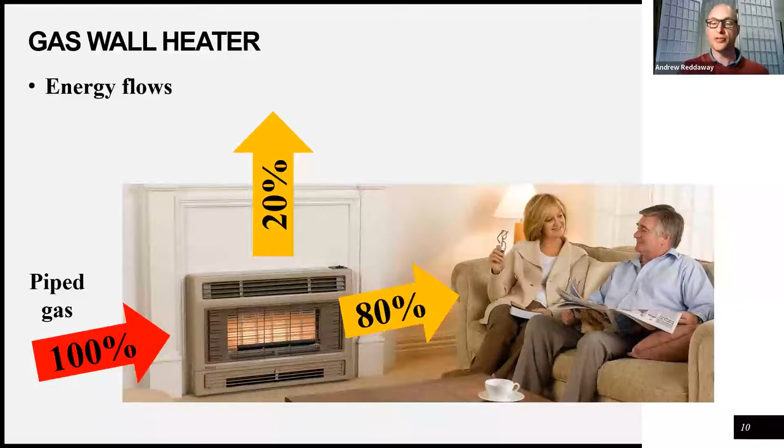There are some gas heaters that are unflued - they haven't got that chimney taking the gas outside, and in that case the combustion product, the gases released by burning, stay inside the home. They're really discouraged nowadays - I think it's really only older appliances or older installations where you might find those. But if you do have an unflued gas heater, you have to be a little bit careful. For example, if you seal up your house really tightly, which is normally a good idea for energy efficiency, with an unflued gas heater some people have run into problems when those combustion gases from burning the fossil gas build up in their home and cause health issues. So that's something to be aware of.

Ducted gas heating - this is quite popular in larger homes, especially in Victoria and also Canberra, not so much in the rest of the country.

There's a few reasons for that. One is the ducts have got a bit of insulation in the walls, but it's not super insulated. So the heater's sending hot air at the start of the duct, but by the time it comes up to the vents in the rooms, it's not as hot as it was. It's losing a bit of heat out, trying to warm up the air under your floor or in your roof cavity.

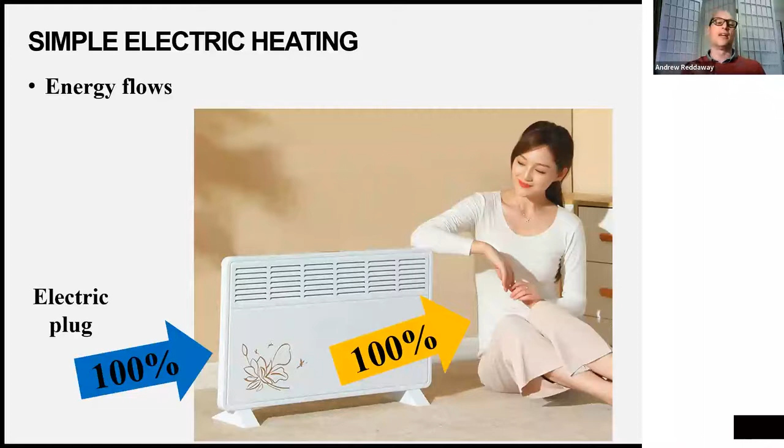So it's extracting heat and moving that heat through the pipe, which comes out of the indoor unit. That's why you can get a 500% efficient appliance. You're not limited to one-to-one anymore, because it's not just converting electricity straight into heat. The electricity is only needed to turn the machinery, and the machinery is moving the heat from outside to inside.

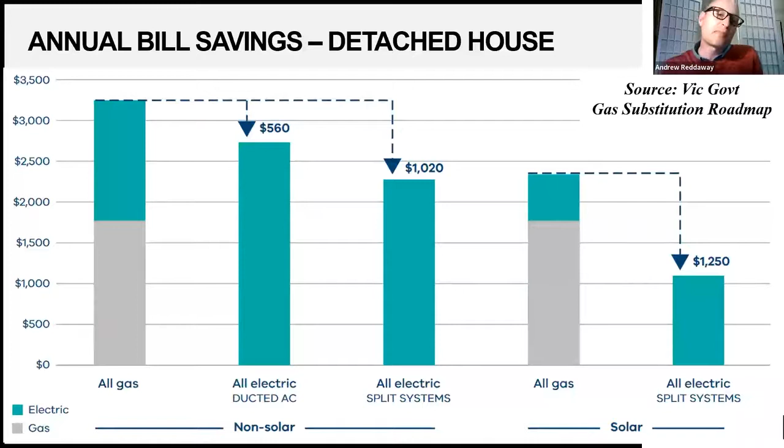All right, let's look at some examples of bill savings. This comes from the Victorian government's gas substitution roadmap, a great document they put out about a month ago. It lays out some of the issues with gas and starts aiming for reducing the amount of gas used in Victoria, substituting it with efficient electric appliances or potentially other options.

So for a detached house, about 4 bedrooms - a typical case - if they've got all appliances like heating, hot water and cooking on gas, your total energy bill is around $1,750 on gas, plus the electric bill on top, bringing you up to about $3,200 per year. Now, if you replace the gas ducted heating with ducted air conditioning instead, your annual bill saving would be about $560. If you replace the old gas ducted heating with split system air conditioners, you're looking at a bill saving of around $1,000 - showing the improved efficiency of split systems over ducted ones.

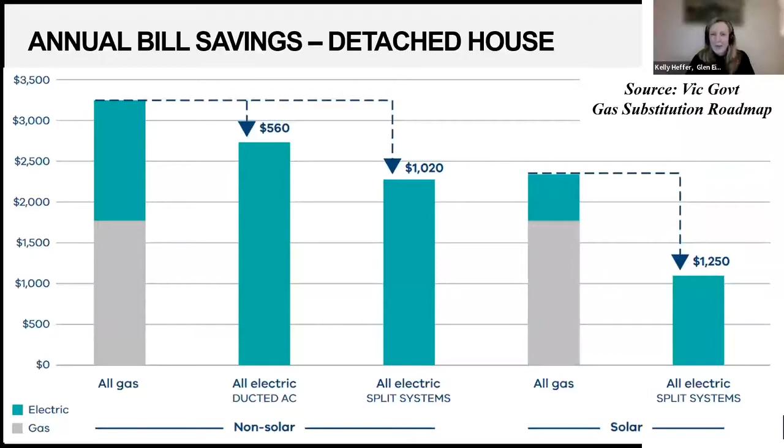Thanks. And Amelia has a question sort of back to the gas ducted heating and split system. So she's got gas ducted heating and also a split aircon in one room. She finds the gas ducted heating heats all rooms, but the split system doesn't. So it's around the question of whether you need a split system in every room like before. She's sharing her view that the split system aircon just isn't as effective, and it's only a couple of years old.

I'm not sure from that description if it's not effective at even heating the room that it's in, or it's just not spreading out to other rooms beyond the room that it's in. It only heats one room, so I guess it's about choosing something powerful enough, or multiple systems if you need it.

Yeah, that's right. A split system aircon is unlikely to be effective at sending air down the corridor and around the corner through another door. It's probably only really going to work effectively in the room it's located in, or the open plan living area it's located in. So if you're looking at multiple rooms or areas, you're looking at either multiple split systems or other alternatives like we discussed.

Oh, but by the way, there are multi-splits. That's where you have one outdoor unit that connects to multiple indoor units. So that's often a good option if you've got several rooms that you're looking to heat and cool.

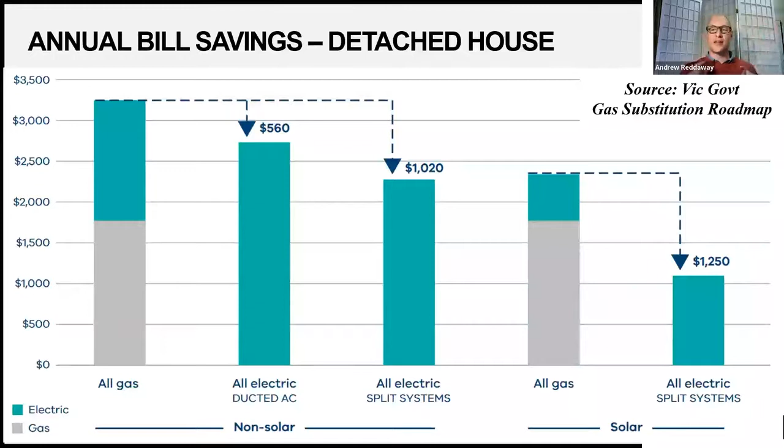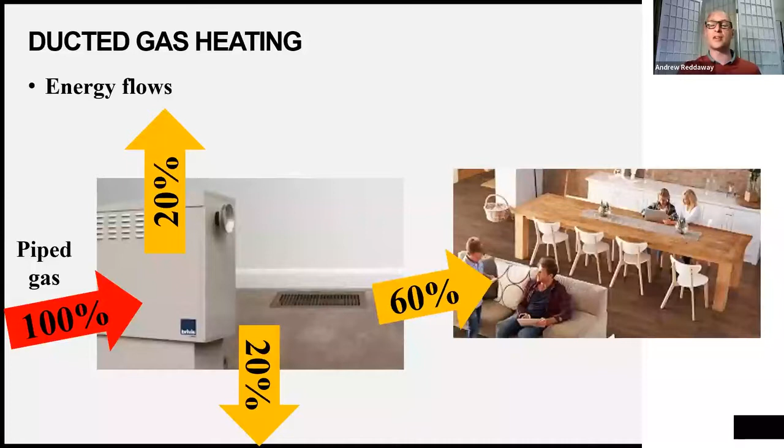Ducted is like what this is talking about here, ducted air conditioner. That's where you have a central air conditioner unit blowing air out through multiple ducts, sending hot air into multiple rooms to come out of a vent like in the ceiling or the floor. Those ducted air cons are very normal - new homes that are being built often have ducted air cons, so that's not hard to achieve at all.

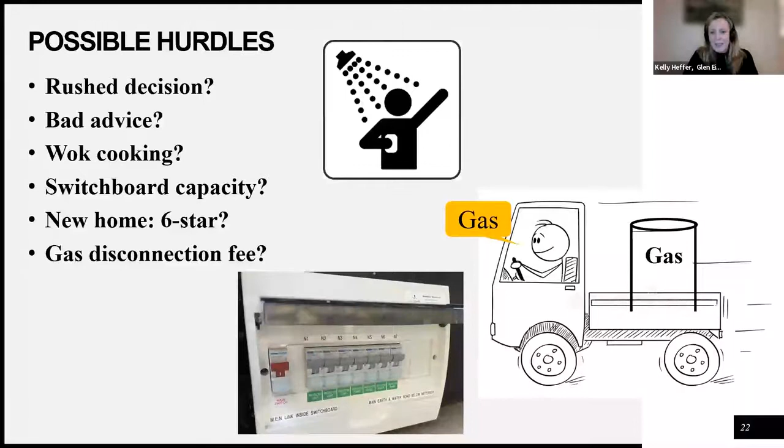Bruce has very helpfully commented on the heat pump hydronic heating question. Radiators are heated up to about 70 or 80 degrees, which requires a very heavy duty heat pump. He gave a finger-in-the-air estimate of around 30K to do that, and commented he'll likely switch to split systems and pull out the radiators. Yes, so that's good advice from the audience.

If you've got an existing hydronic system running on gas and you want to switch to heat pump, it is trickier because the temperatures of the water are different.

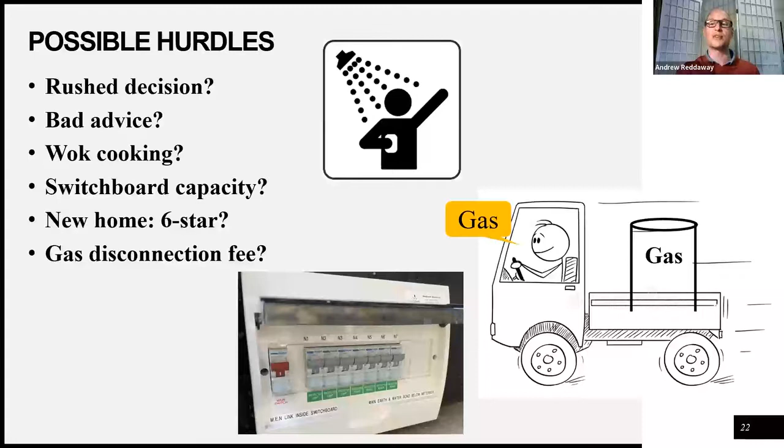Yep, $30,000 for a hydronic system is pretty common. Split systems are different though - there's so many companies out there that do them, the volume is high, and it's pretty easy to get the job done. You can do them bit by bit, starting with a few rooms and adding more later. So they're really the default option, I think.

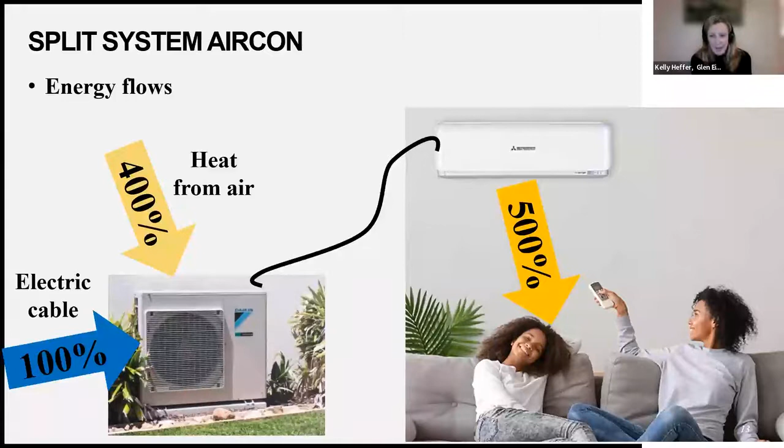Patrick's been helpfully answering a bunch of questions in written form so people can see those responses, and we'll wrap up shortly. Another one from Bruce: solar hot water is known to be inefficient compared to solar PV plus a heat pump, since it doesn't work on cold days, and on sunny days we've got a limited requirement for hot water. Are there plans for that to be improved? I guess it's a question about where the technology is heading.

Solar hot water is the one I mentioned, with the 1 or 2 panels sitting on the roof that aren't generating electricity. I'm not aware of any development on the way with the technology - it's been around since the 1950s or 60s or something.

I'd probably recommend for a standard suburban home that a heat pump is more the way to go these days, and you can save that roof space for solar electric panels. With solar thermal, if it's a sunny day, they work really well and harvest a lot of heat, but then the water tank might be all hot by lunchtime, and those panels are doing nothing.

With the electric panels, they can heat the hot water, and once that's full, they can power other appliances, or send the excess out to the grid, and you earn some money for that. So yeah, it's just a lot more flexible.

Thank you, and we're very much on the home straight - 2 more questions. Anne asked a really good question about what incentives there are for landlords to take up all-electric options. It's still a bit of a missed opportunity at the moment, same story as with installing solar. The upfront cost is borne by the landlord, but the bill savings are enjoyed by the tenant.

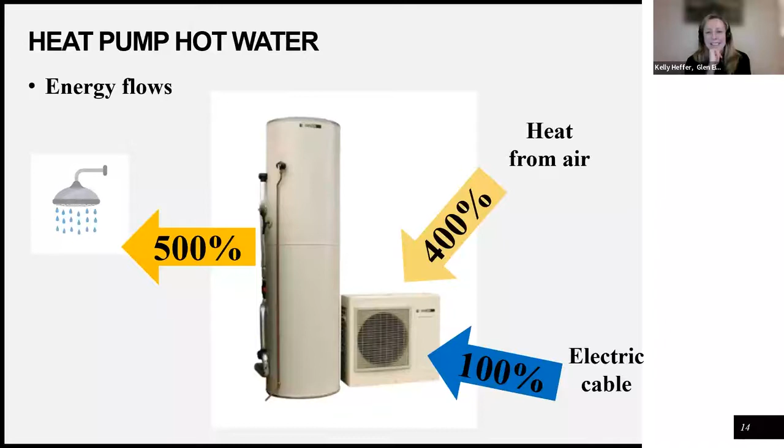And a very last question - this is sort of like a press conference where we just stay here until every question is answered, but we're pretty much done now. Peter asked, what about pacemakers and electric cooking? So finishing on a different note.

That's a good point. If you get an induction cooktop, it will have some warnings about pacemakers. I think it depends on the distance away, so if you're leaning right over the cooktop, that might not be advisable. Just check out the warnings with the specific model of induction cooktop before you commit to it.